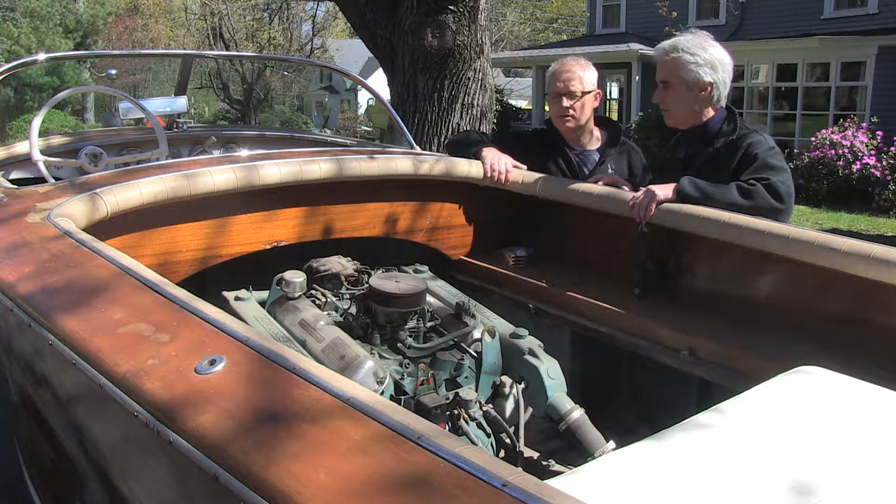And we've got seating for two or three up front, and then we're going to look at the sun pad here in a second, right? Exactly. There's a single cockpit on this model, up front with two, three if you're very, very good friends. But we can take a look in the back and look at the feature that Carlo Riva built into the Florida model. Absolutely.

Well, Bjorn, these Rivas were very well known for their craftsmanship, their beauty and their speed. And I guess they had a variety of engines over the years. So did they start with European and then move over to American power? Yes, in the early days, Carlo Riva used Italian BPM engines, not known for reliability, high RPM, low torque. And in 1953, he traveled, not speaking a word of English, to Detroit to visit Chris Craft, to see if he could become the European importer of Chris Craft engines. And that he obtained.

And from about '53 on he used the Flathead 6 engine, and then went into Chryslers, Chris-Craft V8, GM, and in the later 10 years, from '65 on, he used Crusaders, the Riva Crusader engine, as they called it. And he tweaked them a little bit for his purpose. He had copper manifolds on them, didn't he? Yes, he did.

Even the early Flathead 6 engines, he put oil filters on. They didn't. Chris-Craft did not use that. Right. And he modernized them throughout the time with oil coolers. And the cooling system. He upgraded the cooling system too, right? Yeah. And of course, when Cal Connell from Crusader Marine got involved in 1965 to build what's now called the Riva Crusader engine, he got the brass manifolds, to prevent corrosion for use in salt water.

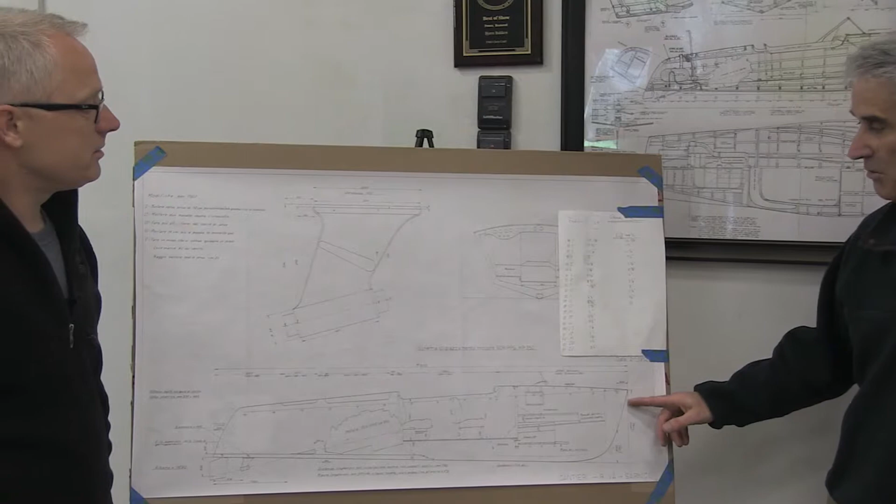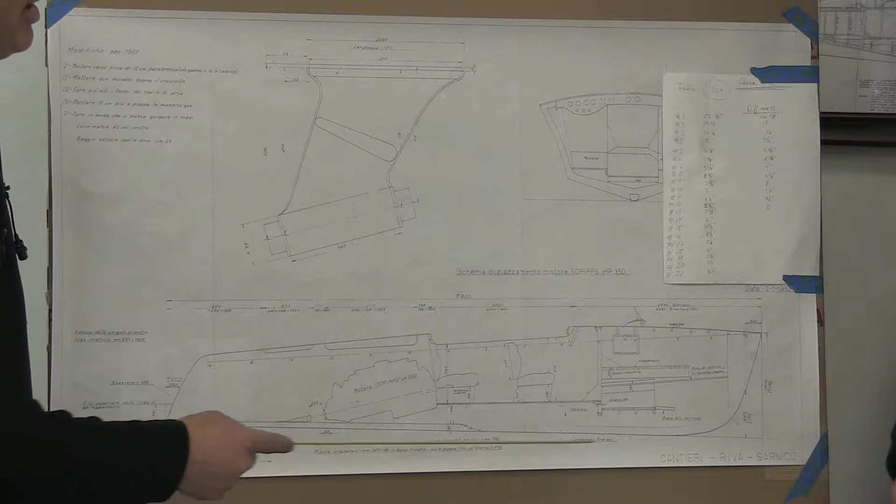I see. All right. Well, you've got a drawing here. Let's move over here. Can you tell us a little bit about the detail here? If we start at the bow, what are some of the important things that you're doing as you craft this drawing? So the drawing we have is basically a plan drawing. It does not have the offsets in it. The project was in such poor shape that the important thing for me is to find the bow angle, the chine dimensions, where the keel is, the spacing between the frames, and where the cockpit and such is placed.

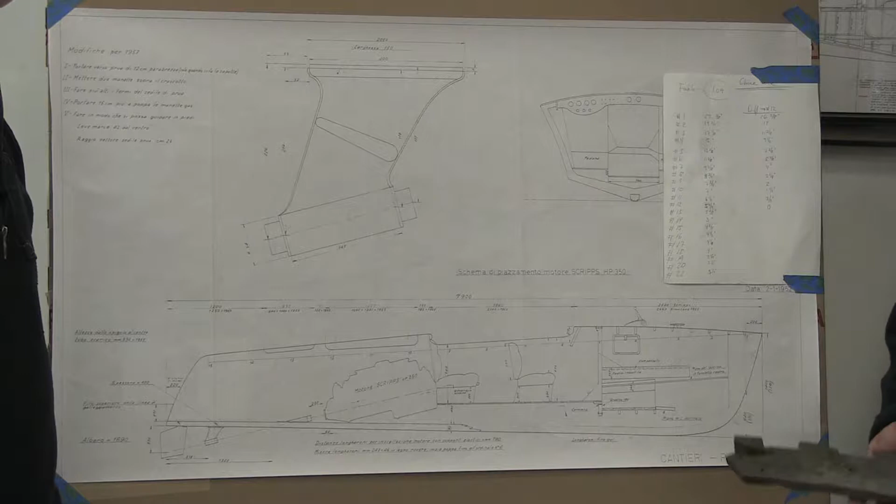And from this drawing and the scale we have, I can make my own offset drawings. The offset from a fixed point up to the chine at frame station 1, 2, 3, all the way back to frame station number 21. I see. So you use a variety of information from the old pieces, similar drawings of similar boats, and whatever drawings you can get from Riva as the foundation, then you build it from there, right? Exactly. If I had the skills, you could do this in CAD as well, but I'm old school, and a pencil and an eraser work just as well.

Well, Bjorn, once you get the drawings together to show you the specifications and different components of the boat, you need to gather a bunch of tools and a bunch of materials.

We've got some around us here. Can you explain what you use? Yes, to restore a wooden boat, you need basic woodworking equipment: bandsaw, table saw, a planer. You need regular handsaw, routers, sanders. Tool-wise, it's basic woodworking tools.

Basic woodworking. Okay. Then you get into the details of the materials you use. We use a little bit of West epoxy for laying up the plywood or the molded sides. We use 3M 5200 for wood-to-wood adhesive. 3M 5200 is actually a sealant, but in woodworking we like to use it as an adhesive because it never dries. Very strong and never dries hard, which is good in the flexibility of a boat.

How about these fastenings? I've got a nail here. This nail's a little different than an ordinary nail. Yeah, it's a copper nail or copper rivet, and this is a mating part. It's a roove. And Riva used that in the joints between the frames. So they put the piece together and they put a roove and a nail in it.

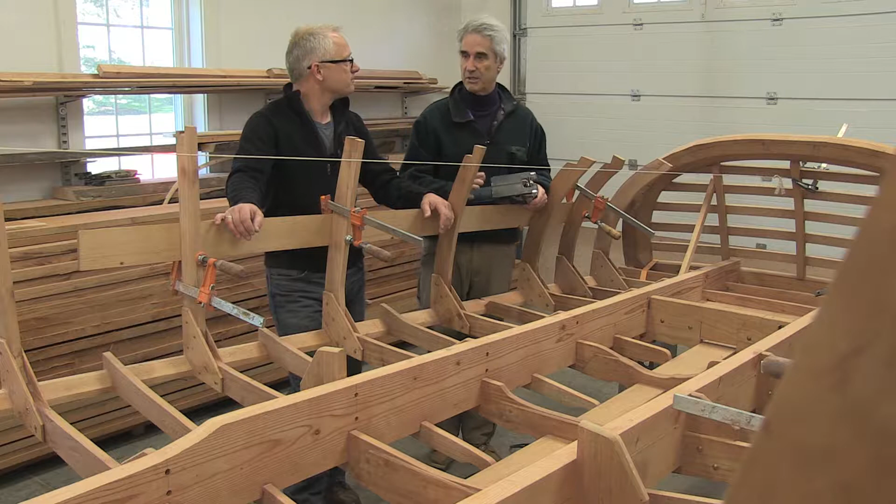Well, Bjorn, when you start building the boat from the drawings, like many boats, this boat is actually turtle. Right now it's right side up, but you start with it in a turtle perspective, like a shell on a turtle. And the first thing you put in are these engine stringers. Exactly. In a boat, there's very few straight surfaces. The only straight surfaces are the engine stringers, this side and this side. You start upside down with the engine stringers, and then you build your frames from aft forward one by one.

Are there close tolerances on these engine stringers? Yeah, the story is that Carlo Riva had a 16th of an inch tolerance on his jigs. So that's the goalpost we have to work with today. That's a very narrow tolerance. And these are made of laminated wood, which was common in the Rivas. They used a lot of lamination for lightweight and strength. The bottom was laminated, the decks were laminated, and the sides laminated in later years. You keep the boat straight and keep the strength in it without cracking and breaking apart.

Bjorn, once you get the engine stringers in place, to those close tolerances, I guess the next step is the frames, right? Exactly, the next thing is the frames, and on this boat there's a lot of frames. They are 11 inches apart, 21 of them in total, and then it's very important that you mark, so when you have all these pieces, you kind of have to figure out where each one of them went. So yes, I mark each piece, so 21 for frame set number 21, it's a starboard side and facing forward.